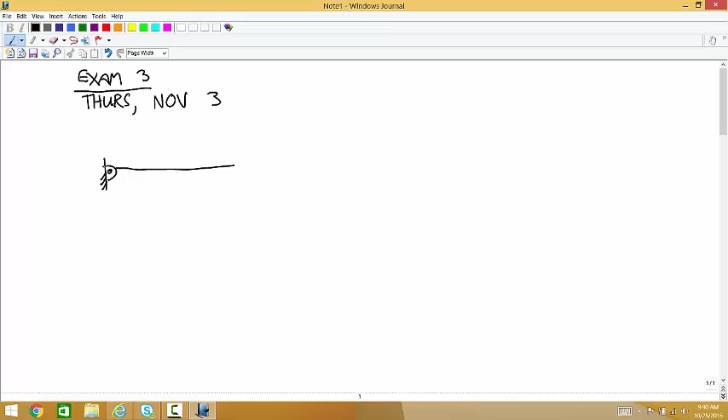So my problem is, I want to capture all the information, I want to get the x-axis, y-axis, I want to calculate the Centroid, and then I want to use it explicitly in my free body diagram. But in our example, it looks like you don't care about the y-axis. So in these problems, where you need to calculate the centroid of a rigid body so that you can use it in a rigid body statics problem, say you have something like this.

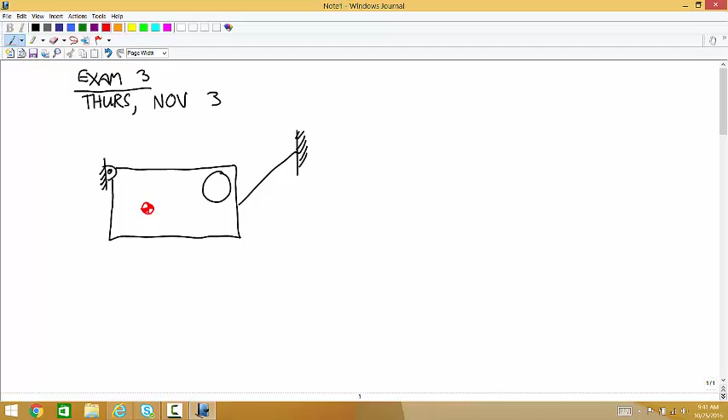To do that problem, you have to figure out where to apply the weight force, and that requires calculating where the centroid is. Say the centroid for this is here. The weight force is straight down, which means you can apply that weight force anywhere along the line of action. And if your coordinate system has x horizontal and y vertical, that means the y position doesn't matter at all. You can set that equal to 0 or whatever you want. It's not going to affect the problem.

That's always true for weight. It's always true for any force, that you can move the point where it acts anywhere along its line of action. So for the weight, if the y-axis is vertical, which isn't always true, but if it is, then the y component never matters. Because you could move this force if you want, you could apply it here. I'm not sure why you would do that, but if you did, you'd get the exact same answer as putting it at the centroid.

So if we have a distributed load on top, and it had a line of action that was horizontal. Yeah, that's what you're looking at. Okay, so this one, you have a weight force.

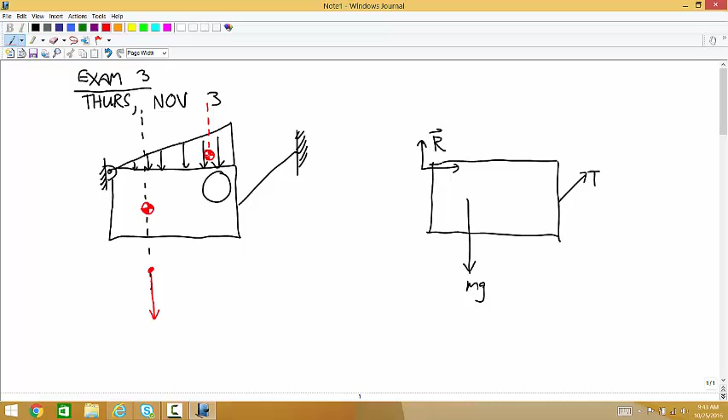The centroid of this thing is here somewhere, right? But the force that we're going to apply at the centroid is vertical, so you can move it anywhere along its line of action, just like the weight force. So you end up not caring about the vertical position of the centroid of the distributed load.

So as long as you keep track of your line of action, you can manipulate your free body diagram. And here's the short answer—that's why it is. But if you just want to know the rules, I think a lot of times those two things go together and reinforce each other.

As long as your y-axis is vertical, for distributed loads and weight forces, the y component doesn't matter of where those are applied. So it could be 0, right? Yeah, you can set it to whatever. But the x has to—the x is the one that matters, because the x position is not along that line of action. Oh, okay, so it's a line of action thing.

Any other homework questions? Number 4? Anyone have that?

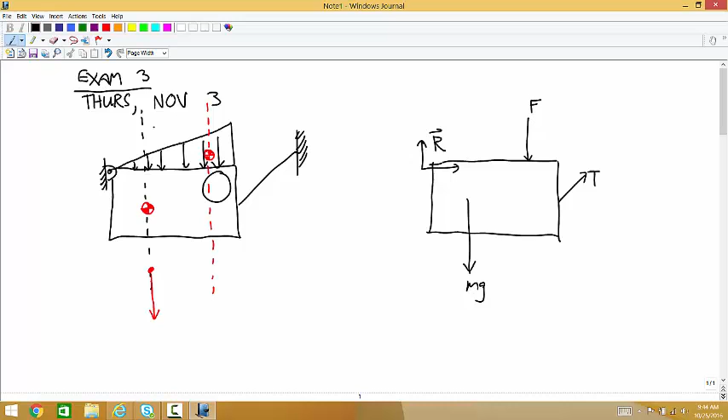Okay, so this one has a pin joint on the left side, and it breaks up like this. This distance is 0.3 meters, this is 0.2 meters. There's a cable like this. This is 0.1, this is 0.1, this is 0.1. The pin is at the midpoint, along that line of symmetry of that top rectangle. And then this distance is 0.4.

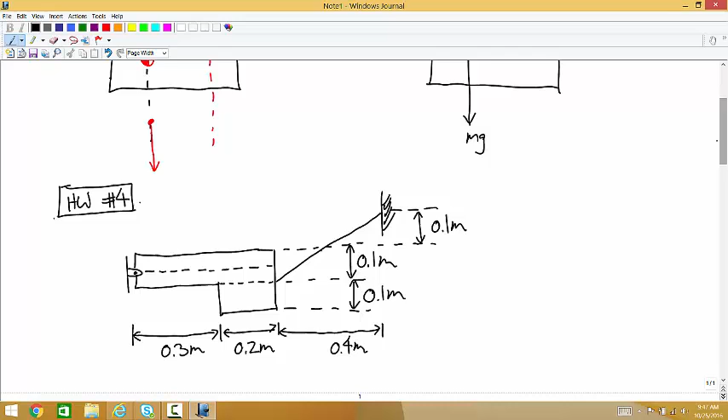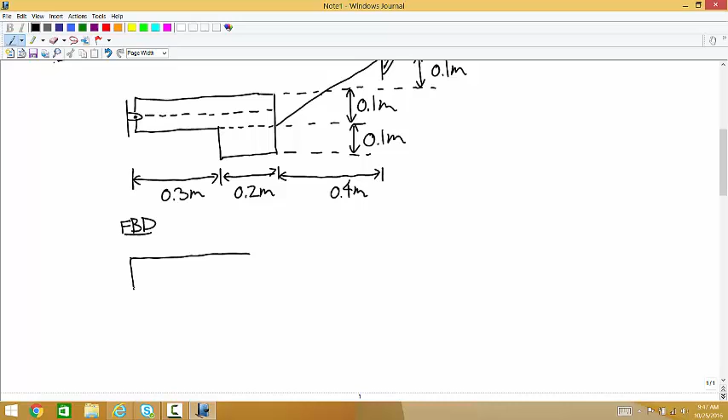I'm not going to go through this whole problem, but let me do the free body diagram. At the pin joint you have a force vector, I'll call that RA. You have to calculate the centroid, and at the centroid there's a weight force—the thing has a mass of 200 kilograms, so this is 1962. And then the only other force is that cable force, T. You can use the locations of the two endpoints of the cable to come up with the unit vector for that tension force.

So in order to do this rigid body problem, you're probably going to choose your about point here, so you might as well put your origin there too. And if your origin's going to be there, then that's where you want the origin to be for your centroid calculation. It doesn't have to be, but you'll have to change things around after you find the centroid if you don't do it that way.

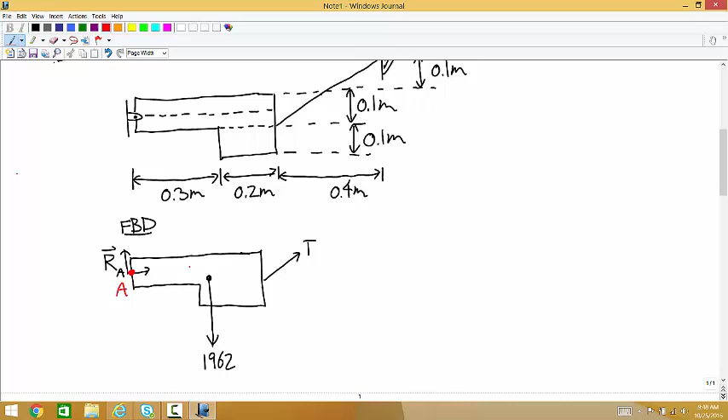For the centroid, you can break this up a couple ways. This is the way I think I would probably do it, 1 and 2, with the origin here. Then calculate the area and centroid of 1 and 2, use the summation formula to find the total centroid. All you need is the x location of the centroid because you're just using it for the weight, but you could calculate both.

Okay, so what if you chose your origin to be here? That's fine. You'll get a value for the centroid that's negative in x, positive in y. Then you have to decide whether you're going to do all your calculations for the rigid body problem in this coordinate system, or whether you want to translate the coordinates into a new coordinate system. And then you would think, oh, I wish I'd just done it this way from the start.

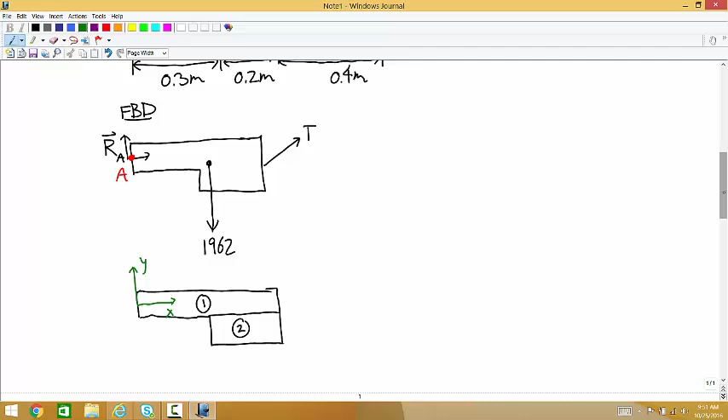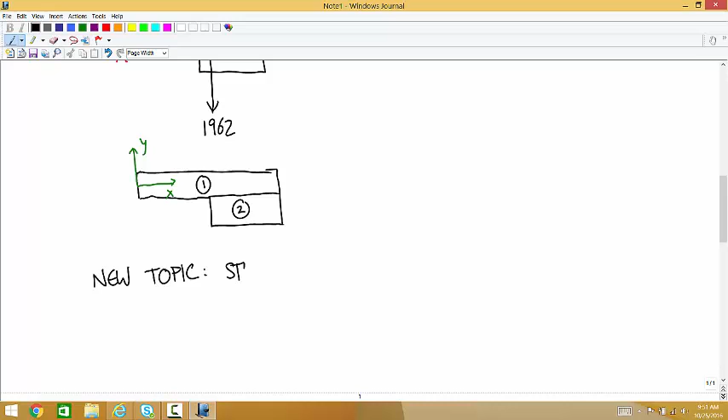Okay, so today we're going to introduce structures. And this is the main topic in this class.

If you went to 100 engineering professors and asked them to test you on how well you know statics, 97 of them would say they don't have time to do that, and that's a weird question to ask. The other 3 would give you structures problems. So this is like, how well do you know statics? If people want to know how well you know statics, they want to know how well you know how to do structures.

And structures are—a structure is a collection of rigid bodies connected by joints.

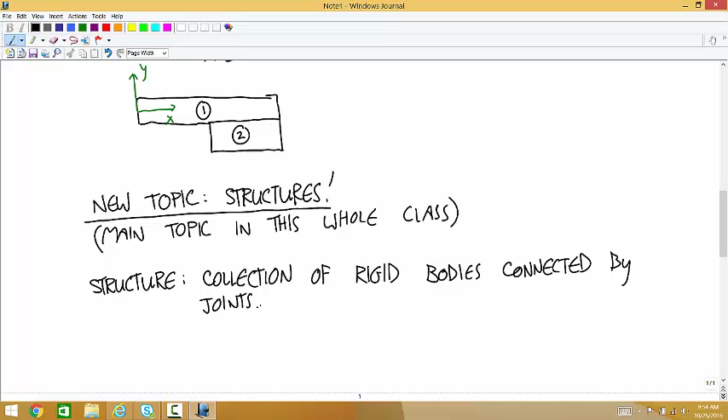So will these be the same type of joints we've seen before? Yep, the same. So in a way, this is nothing but a bunch of individual rigid body problems where at the end you just have to solve a big system of equations. We're going to isolate individual rigid bodies and find Newton's laws. After that's been done for each body, you have a big system of equations.

And the way you want to solve it is reduced row echelon form. You're definitely not going to look at this and think doing it by substitution looks fun.

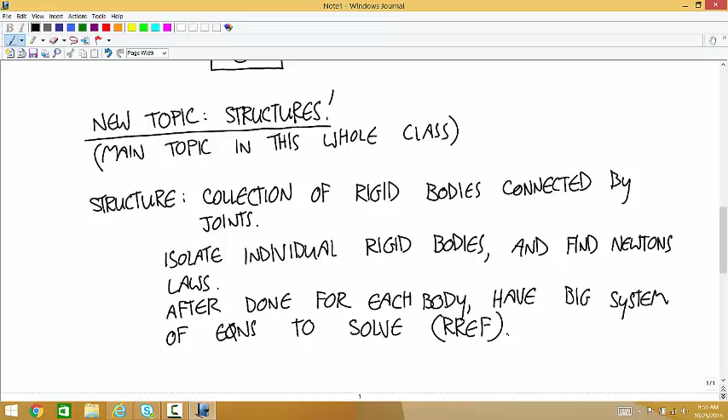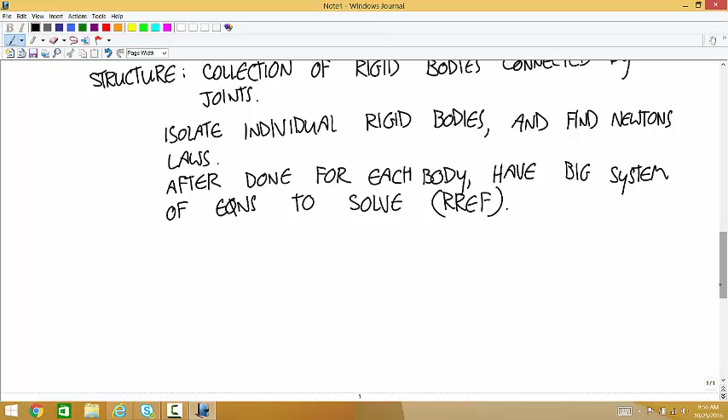So I am going to start by introducing a problem. We're just going to think our way through it, and there's nothing we can't just think through with the knowledge we have now. After I think through it, I'm going to do this problem two ways. Then after that, I'm going to give you a general set of steps that will streamline the process.

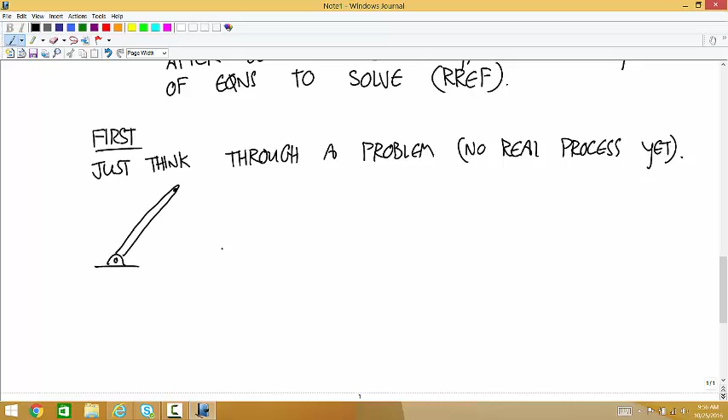So the first thing I'm going to do is just think through a problem. There's no real process yet. So let's say that we have an equilateral triangle, and each of these sides is 1 meter long.

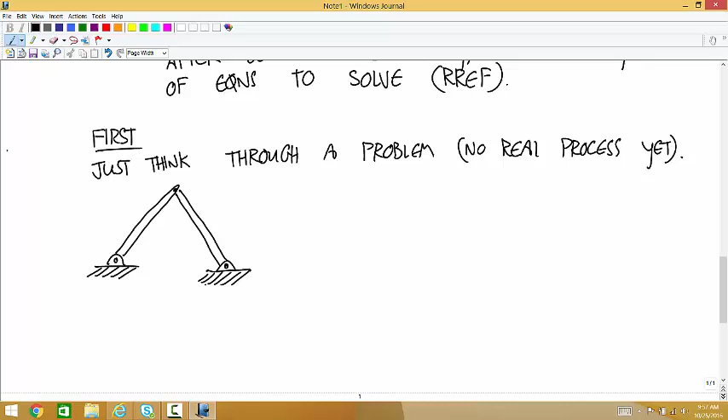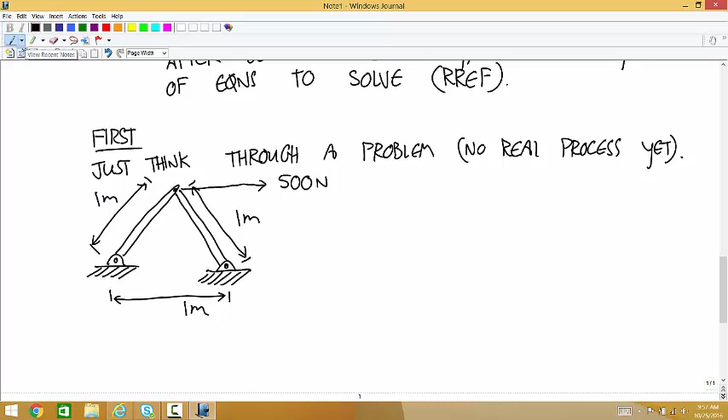And let's say there's a force of 500 newtons applied to the right from the top pin. In order to keep track of what member we're talking about, let's think of the left member as number 1, the right member as number 2, and the pins as A, B, and C.

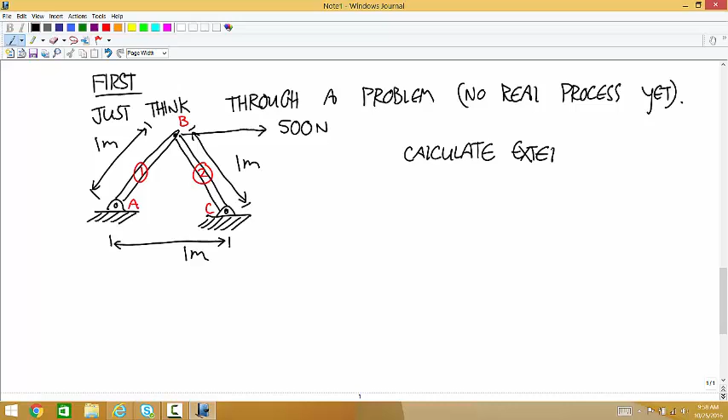And let's say that we want to calculate the external loads on each member.

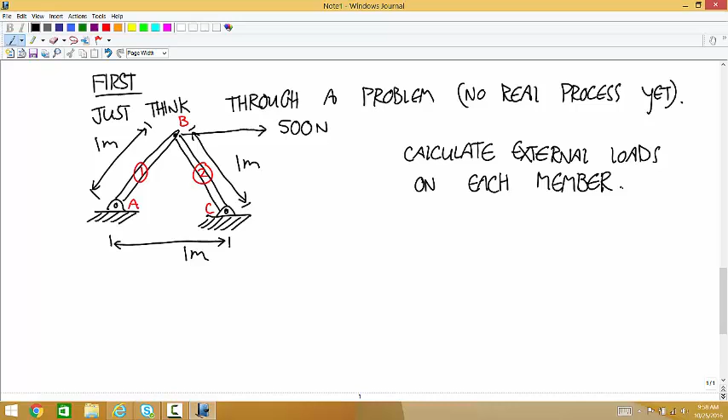One thing we could do is isolate member 1, member 2, and then those pins—you can think of those as individual things. So we could do a particle statics analysis of pin A, pin B, and pin C.

Let's actually skip that step. Instead, we're going to lump these pins in with bodies. That's fine to do—they don't have to be connected or whatever. We're just going to say...

We'll assume that we'll treat pin A as part of the ground, pin B as part of member 1, and pin C as part of the ground. That's going to cut out a few equations because we won't have to isolate those pins—they're just treated as part of the body.

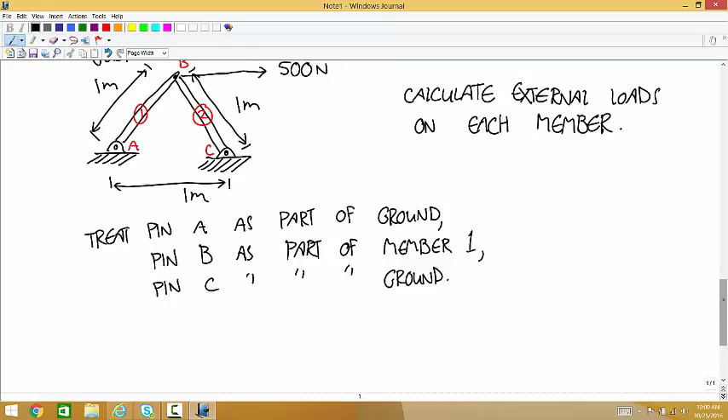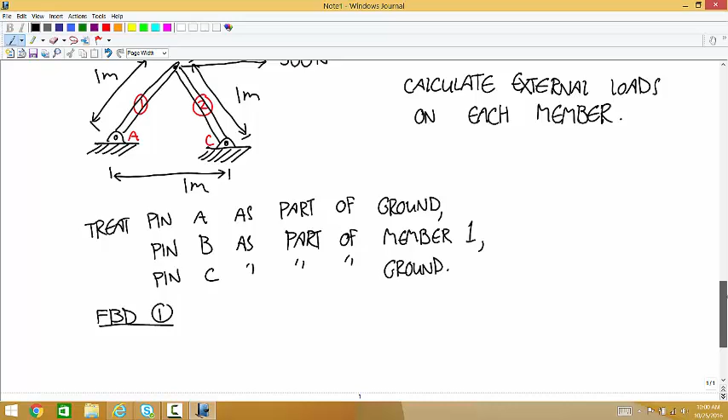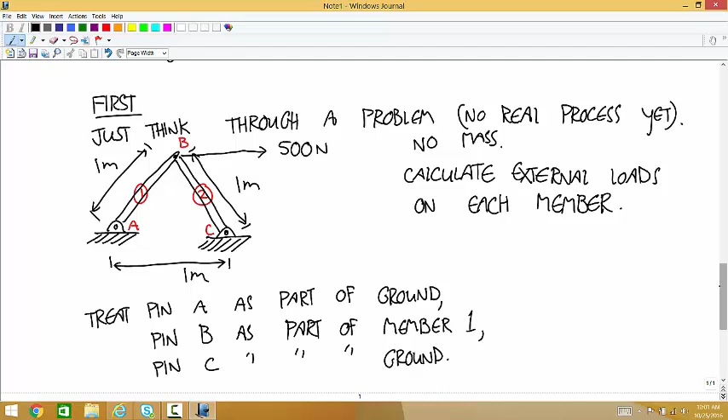Now I'm going to start with member 1. We'll do a free body diagram of member 1 and go through that analysis. So what loads are acting on member 1? Let's ignore the weight for now—ignore the mass of this thing. So what forces are acting?

Down here at pin A, that's a pin joint. So what type of loads are acting on member 1 at A? Full force vector, yep—just using the rules of these joints. We're treating that as part of the ground load? The pin is part of the ground, yeah. So this is a force applied by the ground—really that pin to the member. I'll call that RA, a force vector applied by the ground, the same way you would if that was a rigid body problem.

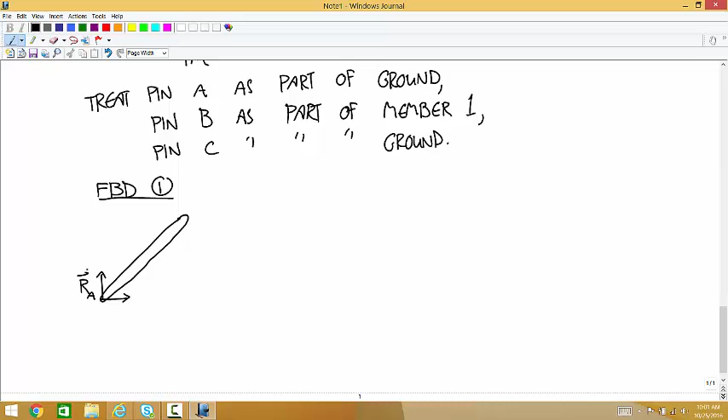And then up at B, all of the forces up here are being applied—they're not really being applied to member 1 proper, they're being applied to the pin. But we're treating the pin as if it's part of member 1, lumping it in. So what forces are being applied to member 1 up at B? Well, definitely that 500 Newton force.

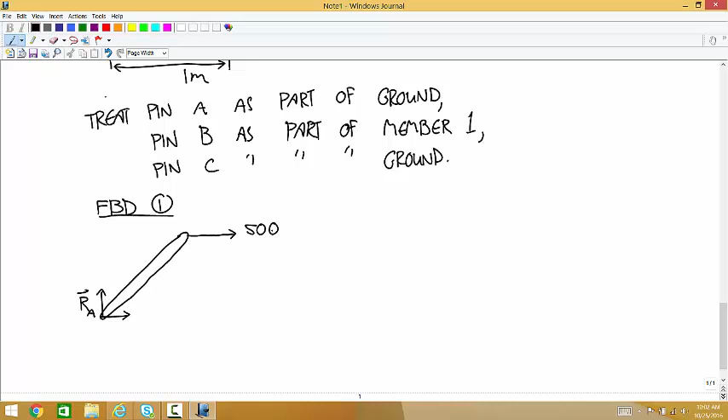And second, there's a pin joint connecting 1 and 2. So there's a full force vector up here. We know it's a force vector because those are the loads that a pin joint applies. I'll write this as the force on 1 by 2.

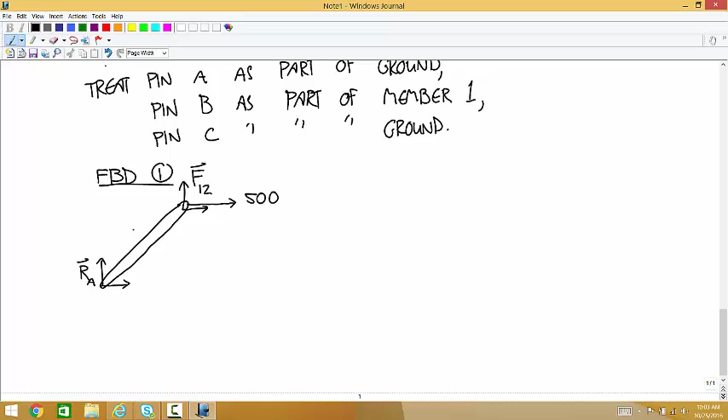Any questions about that free body diagram? It's just for one body, right? Because we have to isolate the individual bodies that make up the structure. This has three individual bodies, but it's just 2 in this case because we're not going to isolate the ground.

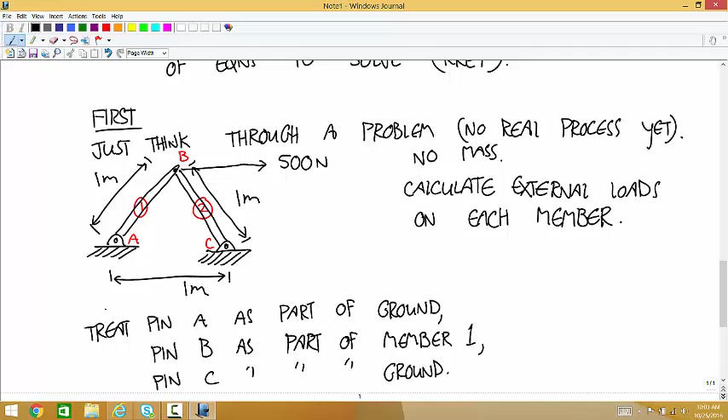Can we put them together and isolate them as one body, or do we have to do it separately? You can, but that's not enough to give more useful equations. We'll see how many variables we have, and that's just not enough to do it. From this one alone, right now we have 4 variables. We know we're only going to get 3 equations from a rigid body, so this isn't enough to do it.

Okay, so now let's figure out the forces and the moments. What do you want to choose as an about point for this? Choose it up here - it eliminates the moment for 2 forces instead of 1.

So, for the force F12, what's the r vector? F12 acts at the about point, so if you think about this red dot as being the origin, the r vector is 0, 0. The force vector is F12x, F12y. Cross product is 0. Now we'll do that 500 Newton force - what's the r vector for that? 0. The force is 500, 0. Cross product is 0.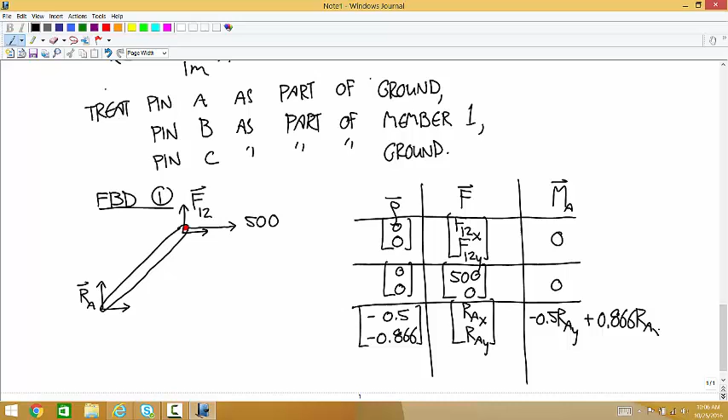Any questions about any of that? So now we're just going to write out these equations. I'm going to skip the step of writing out Newton's laws and just put them into the equation form we'll use later. So Newton's second law, x components: F12x plus 500 plus RAX equals 0. Reformatted, that says F12x plus RAX equals negative 500.

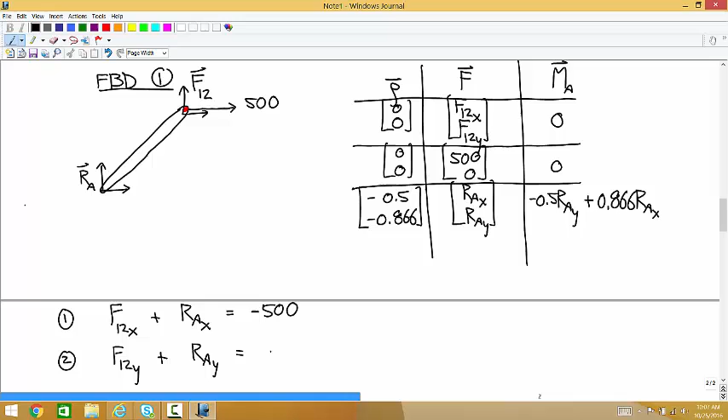Anyone not like me doing this? Should I just write it out? Maybe it can't hurt. Everyone feel okay with this? Okay, and then the second equation says F12y plus RAY equals 0. And then the third equation, rearranging, says 0.866 RAX minus 0.5 RAY equals 0.

So those are our first three equations. Let's think about what we have as variables. We have F12, that's a full vector of variables, and we have RA, that's a full vector of variables. So we have 4 total variables, the 2 components for each one, and we have 3 equations, so we know we can't solve this system. We're just going to hang on to these equations and isolate the other body.

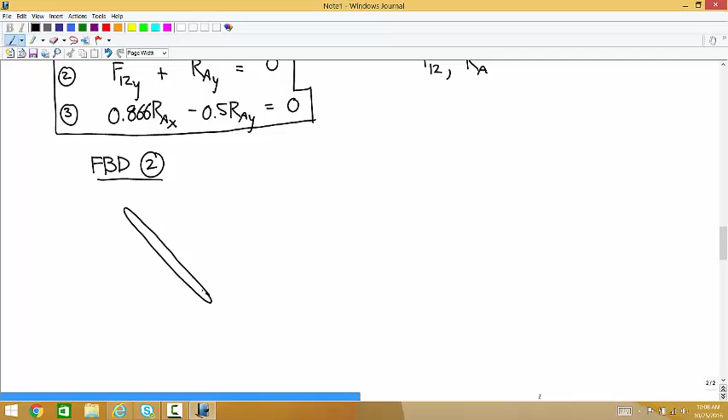So now a free body diagram of member 2. What forces are acting on member 2? Well, the easy one is at C - that's a pin joint with the ground, so I'll just call that RC.

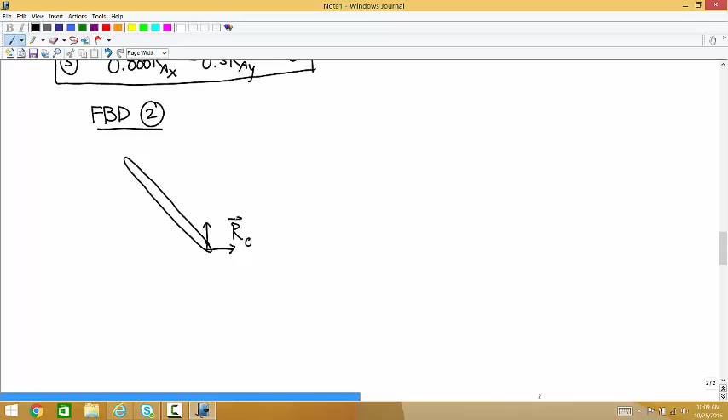And now let's think about what's happening up at the top. This is a little trickier. Remember that the way we've decided to think of this thing, member 1 is a combination of this rigid body 1 and the pin. So member 1 is a body with a pin in it. Member 2 doesn't have a pin in it because you only have one pin, and we chose to lump it in with member 1. You got me on that one?

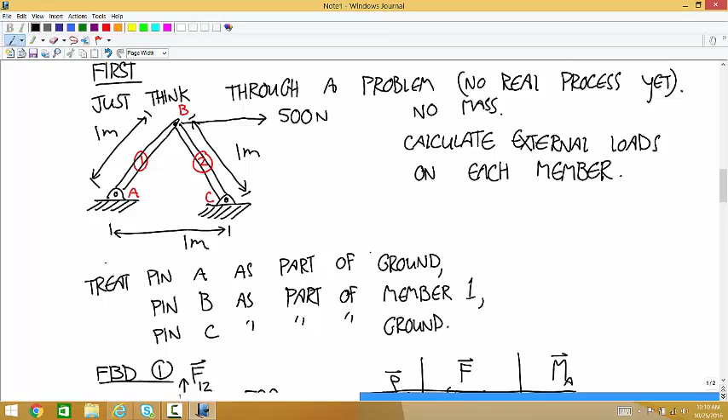And so that 500 Newton force is applied to the pin. It's not applied to member 2, it's applied to member 1. So it's not going to show up in our free body diagram of 2. But 2 and 1 touch each other, so there is a force on 2 by 1. So over here there's a force on 2 by 1, but there's no 500.

Let's think for a second about what variables we're going to introduce with Newton's laws. We're going to introduce RCX and RCY. There's no way around that. So we're introducing two new variables for sure.

But now let's think about this one: F21X and Y. We don't have those variables yet, but we do have F12X and Y. Newton's third law says this is equal to negative F12. So if we use Newton's third law to re-represent F21 as negative F12, we can reduce the number of variables.

But isn't that F21 representing all the force coming from member 1? Yes. Wouldn't that include some amount of force from the 500 Newton force? That 500 Newton force does—if you took that away, there would be a different reaction force up here. So you're right about that. But all of that, whatever that 500 Newton force does, it's applied through this force F21. It translates to this force F21. That 500 Newton force can't be applied to member 2 because it's not acting on 2.

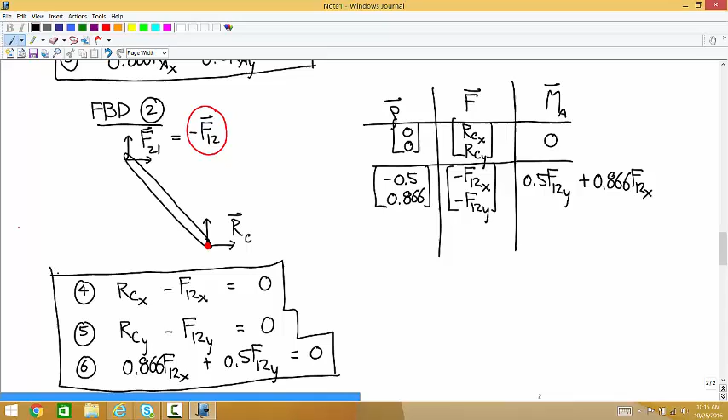Okay, so now we're up to 6 equations. Let's think about our variables: we have F12 x and y components, RA x and y components from those first three equations, and RC from the second set of three equations. So 6 variables, 6 equations—that's a system we can solve.

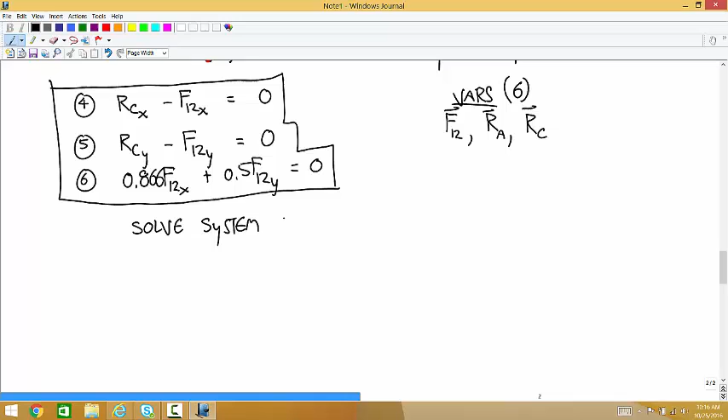Okay, so once you solve that system, what you get out of it is—I wrote this sort of funny—F12 is negative 250, positive 433. RA is negative 250, negative 433, and RC is negative 250, positive 433.

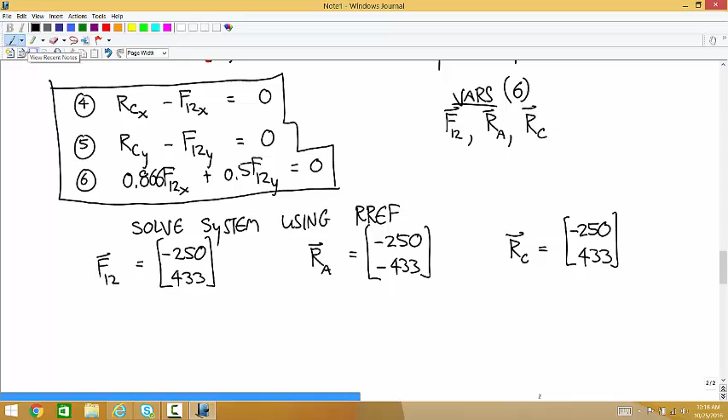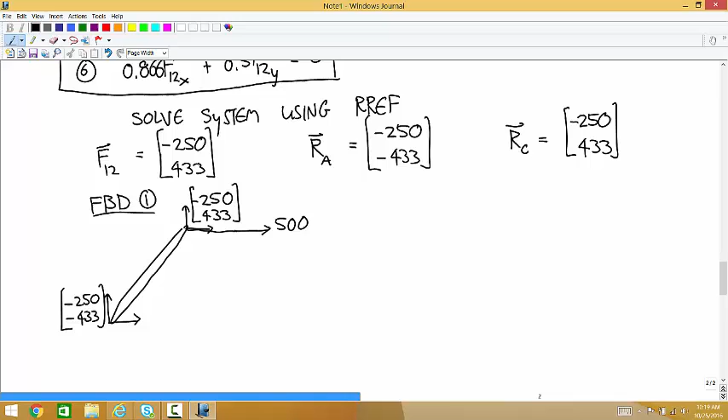Okay, so now let's think about what that tells us about the forces acting on those members. Let's go back to a free body diagram of 1. Down at A, we have negative 250, negative 433. Up at the pin at B, we have negative 250, positive 433, and we also have a 500 Newton force to the right. All I'm doing now is filling in the variables that we had from the free body diagram at the beginning.

I can rewrite this since this 500 Newton force is acting at the same point as this F12. This comes out to add up to positive 250, 433. And down here, negative 250, negative 433.

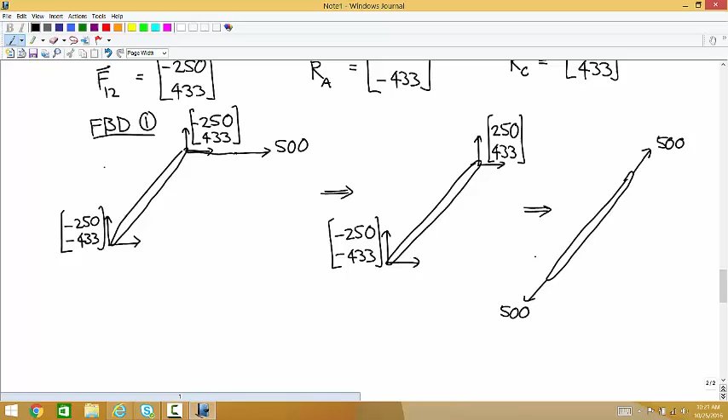Do you happen to notice anything about the directions of those forces? This isn't so important right now, but they're equal and opposite, and they also lie right along the line of this beam. So this beam is in pure tension, and if you calculate the magnitude of this force, it's 500 that way, 500 that way. Wouldn't that just be zero net force then? Well, in statics everything comes out to be zero net force because it's static. But this tells us important things about how likely it is that there's going to be a fracture somewhere—if you apply a tension like this to the body, it's going to behave a lot differently than if you apply a tension of 10,000 to it.

And then the free body diagram of body 2.

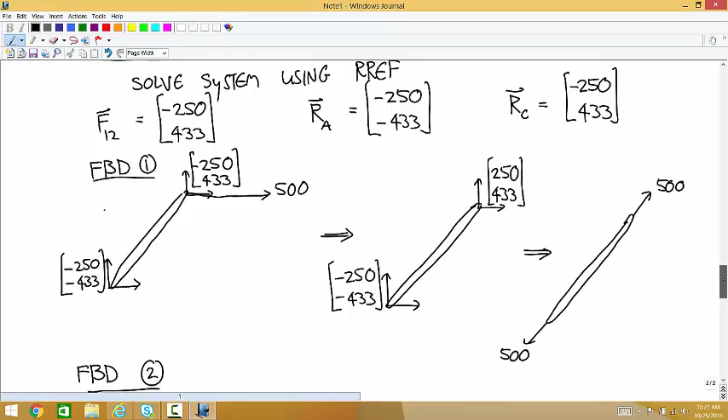Down at the bottom, we have RC. That's negative 250, positive 433. And up at the top, we have negative F12, so the opposite of this F12 that we solved for: 250, negative 433. It's equal and opposite again, and again it's lying right along the length of that body. This time it's the other direction though, so this time we have a compression of 500, 500.

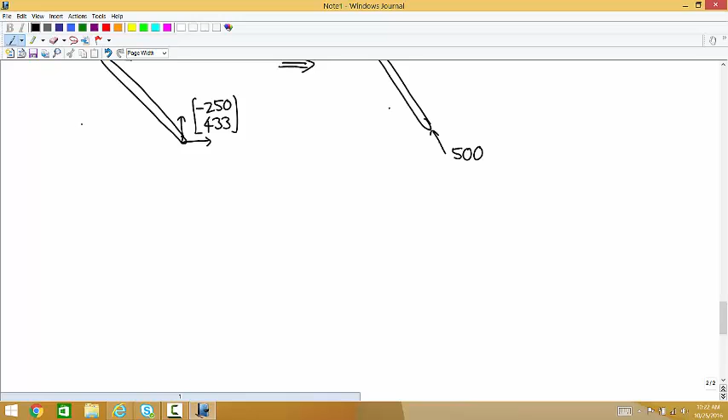So before I say something about the tension and compression that we have there, anybody have any questions about the process? There were some places where, without any more information, I'm sure it would have been tricky, or you would have gotten stuck trying to make these jumps around using Newton's third law or whatever. But I think everything should make sense that we did.

Jesse, yeah? As far as numbering pins, if you were to have a problem with more pins, is a good way to do that making the pins that are on top like 1, and then pins that are on the bottom like 2, and so forth?

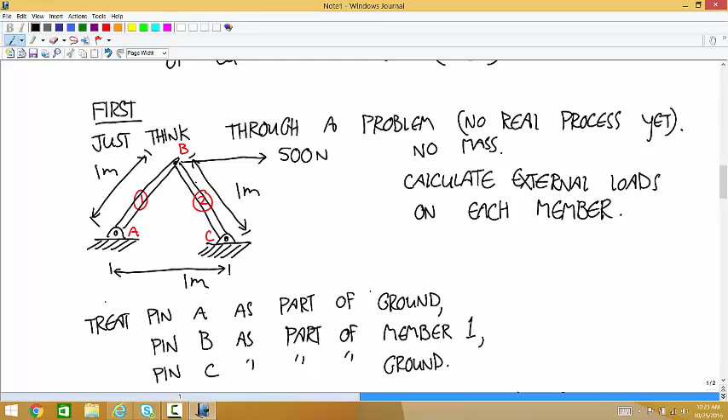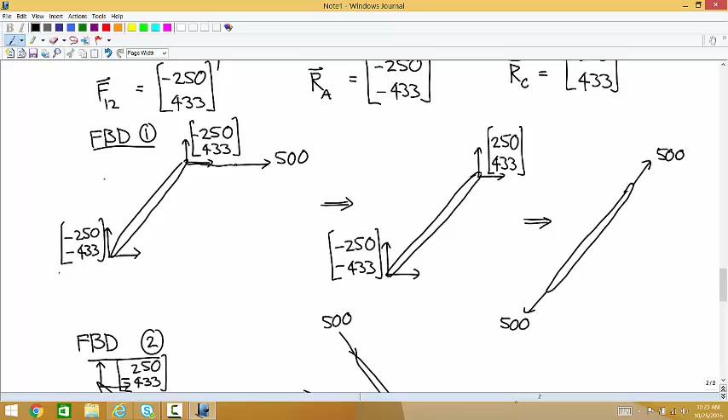It doesn't matter, and that's an important point actually. This is a sort of funny, cool thing. What if I had numbered it the other way, and then I lumped the pin in with member 1 just because it's number 1, it should get the pin? But what if we had called this member 1, and then the pin would have been over here, and the 500 would have been applied to member 2? That changes everything, right? You'd think so, but when you get down to the end, you would get this exact thing back. So it just doesn't matter. The numbering that you choose is just for your own bookkeeping. This is the real thing, and no matter how you number it, this is what you get at the end.

What if the 500 were applied to both 1 and 2? Would that change the answer? Well, then mathematically, if you applied it to 1 and 2, that would be like solving a problem where instead of 500, this was 1,000, because you'd be double counting it, and so your answers would be wrong.

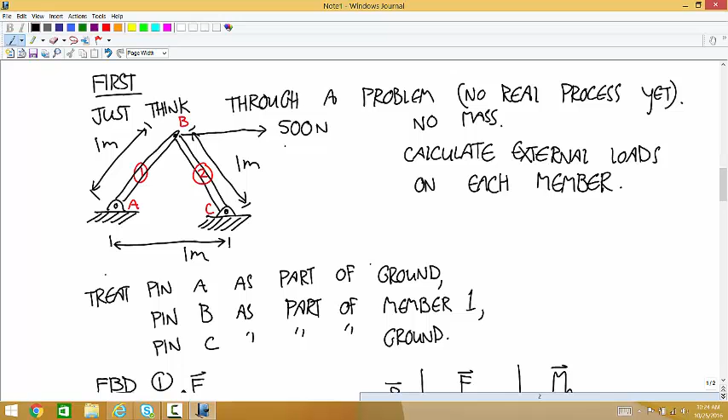Yes? Why can you use different coordinate systems when dealing with different members? Is it just because you're coming out with force vectors? Well, what you're really doing is, in a way, you're not. That's a good and important question. You're not really choosing to change the coordinate system. What you're doing is just an approach that you can use to calculate those rho vectors, and those rho vectors only care about that's just a vector going from one point to the other.

If you wanted to, and I think in my solutions this is still how it appears, you could keep the origin the same, calculate the coordinates of the beginning and end point for that rho vector, and then subtract them to get the rho vector, and you'll get the same answers as you do this way. It's just an approach to calculating rho vectors. Okay.

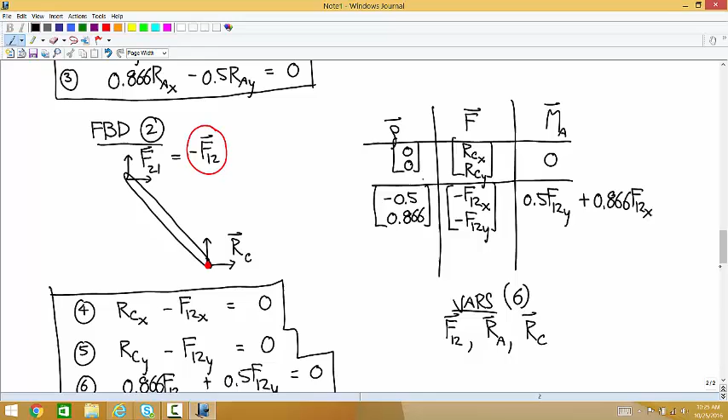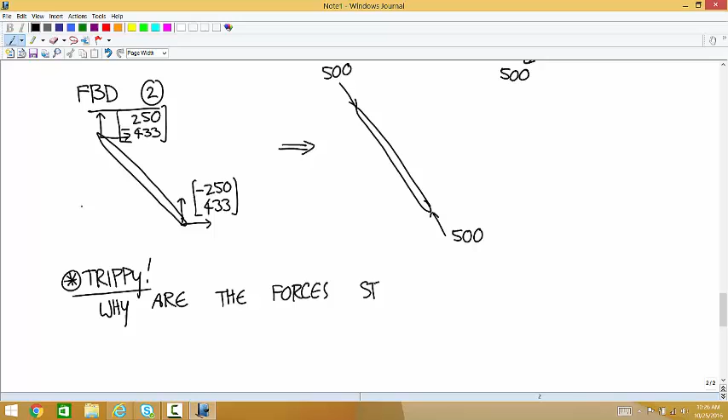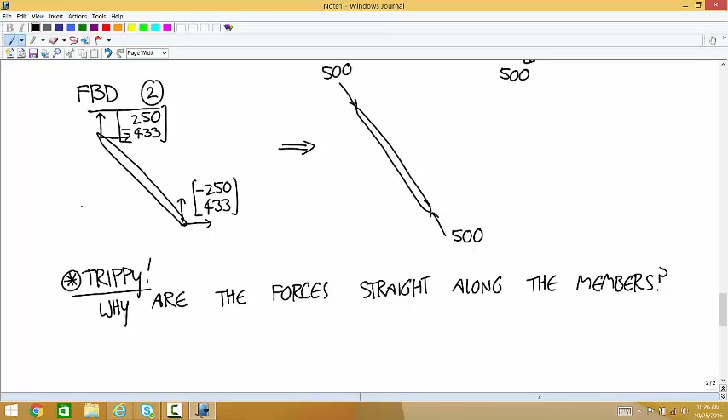Okay, so here, trippy. Why are the forces straight along the members? That has to be the case for any two-force body in static equilibrium.

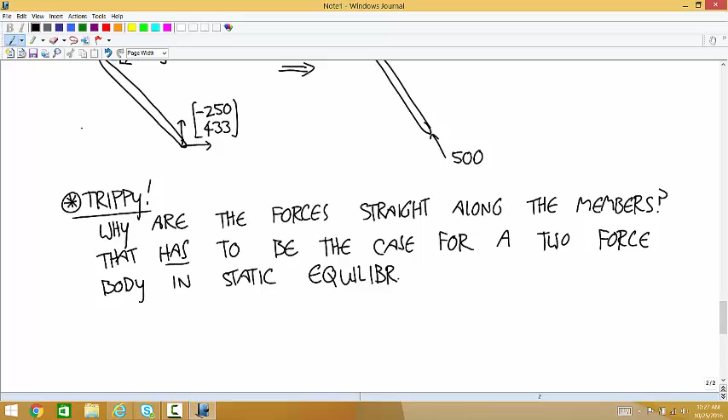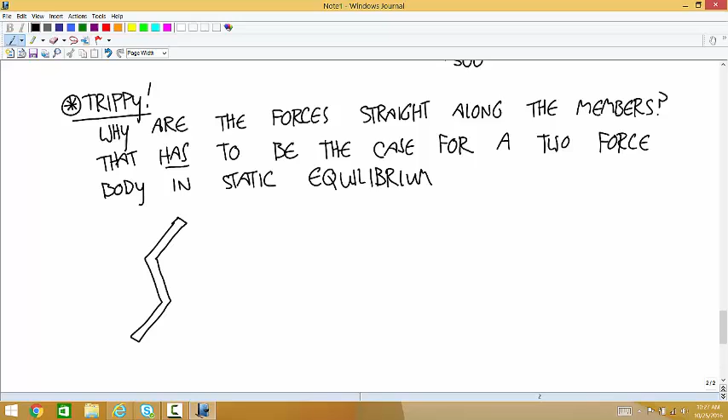So let's see why that is. Imagine that our two-force body is this - okay, there's no reason it has to be straight. And let's say that the forces are here, I'll call that F1, and here, F2.

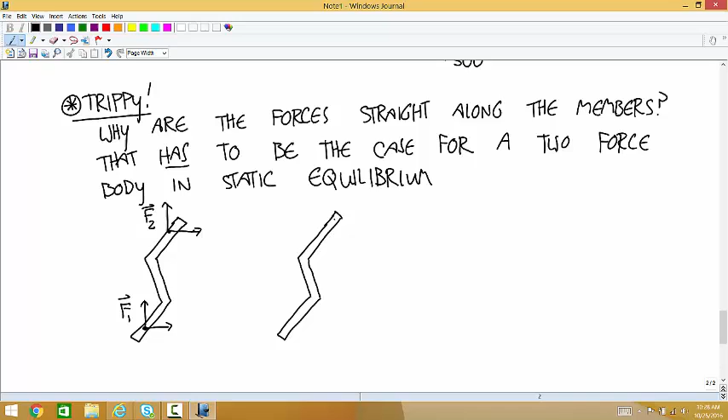Okay, so let's think about two possibilities. Well, what if they're not equal and opposite? What if one goes this way and one goes this way? Well, then it can't be in static equilibrium because the net force is not a zero vector, so you're going to get acceleration, translational acceleration. So that's not possible. These forces must be equal and opposite.

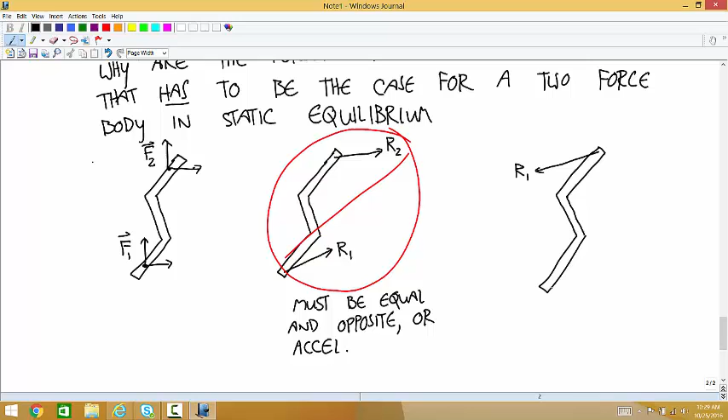Or there's acceleration, which violates the idea that this has to be in static equilibrium. Now how about this possibility? What if the forces are equal and opposite, but that doesn't explain why they have to be along the length of the member. What if one force goes this way and one goes this way? Those are equal and opposite, so what problems arise if the forces aren't equal?

Even if they are equal forces, let's say they're both equal and opposite. So now there's no translational acceleration. But what is going to happen? It's going to spin. So those forces must be along the line connecting them, or you'd get angular acceleration.

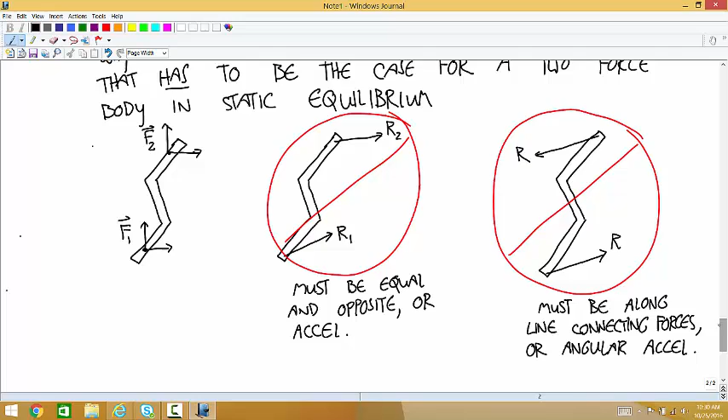Two-force members are not going to come up in structures very often, and that's because in a structure, a single member always has two joints to be part of the structure, and if you include the body's weight, that's a third force, and this condition doesn't hold. So two-force bodies must be weightless. That's why this doesn't come up too often, but I will talk about that more later as part of the truss simplification.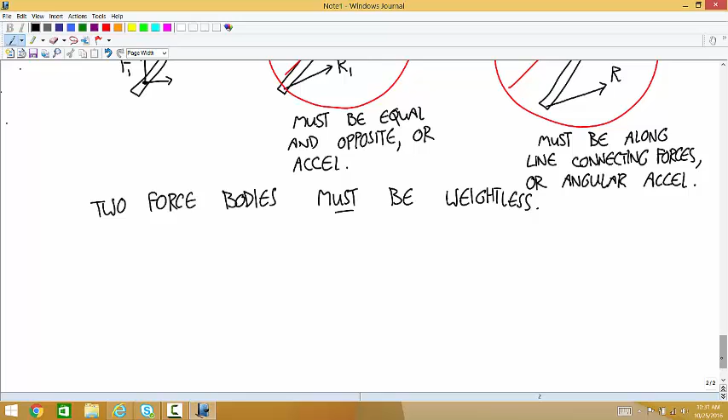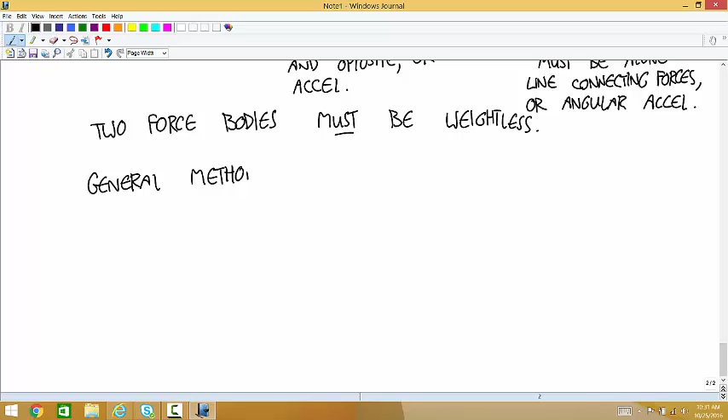Now let me give a general method for structures. It basically outlines the steps we followed in the last example, but it's something you can keep next to you while working through structures, especially at first, to make sure you're not missing any steps.

For structures, will we generally just look at the individual pieces and not treat two rigid body structures connected together as one? You could still just solve it as a single structure using the same approach. Will it generally just be two-force members with one joint on each end? Well, usually they'll have weight attached too, but there's no reason a member only has two joints. That's the more common case, but you could have three or more joints on a single member.

So the first step: number the members. At each joint, some subset of the members will join.

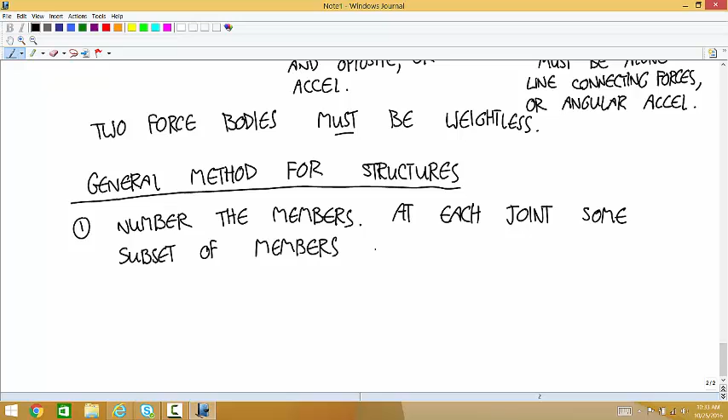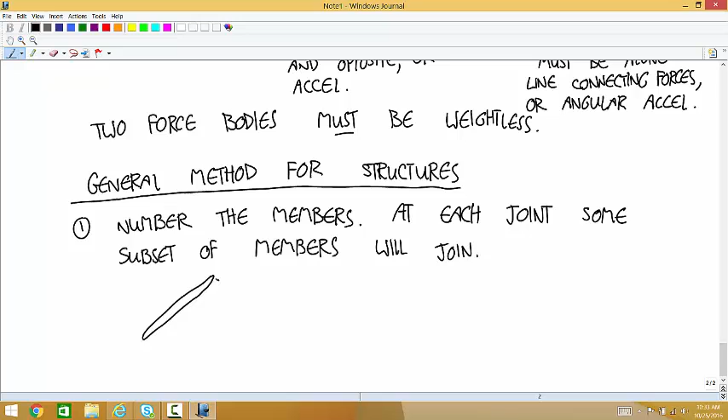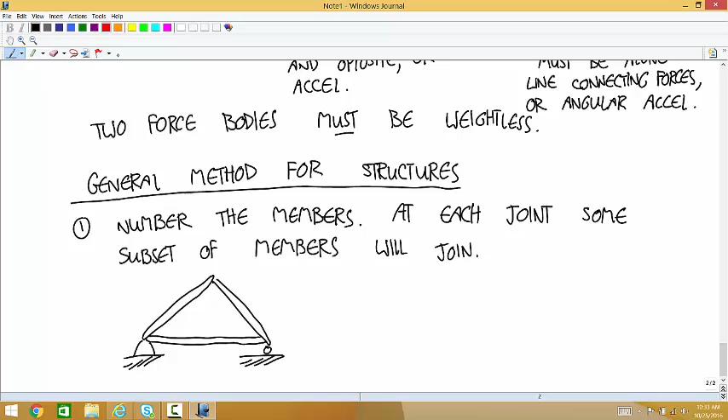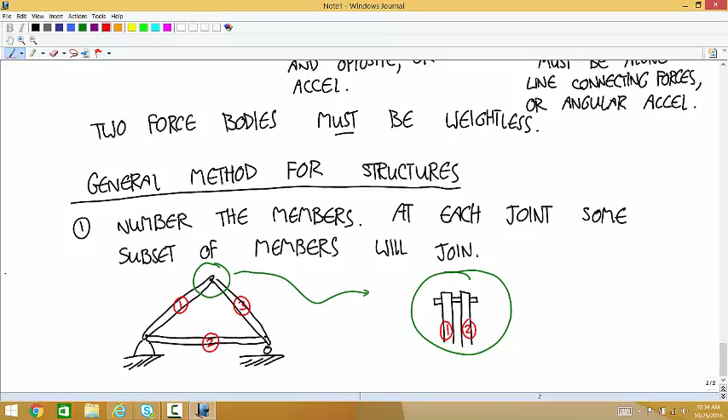Let's say this is the structure. You can number it however you want, but I usually do it from left to right. If you think of a side view of the top pin, and these are all supposed to be connected by pin joints, you'd see member 1 and member 3 not touching each other, but each one touching the pin. That doesn't have to be exactly how the pin joint works, but it's a way to think about it to understand how to do these calculations. So if this is member 1, this is member 3, and this is the pin joining them, members 1 and 3 don't touch each other, but each touches the pin. This scenario is at joint 1 and 3.

1 and 2 would be the other joint. That's good you told me that, because that would have been very confusing. Any questions about that?

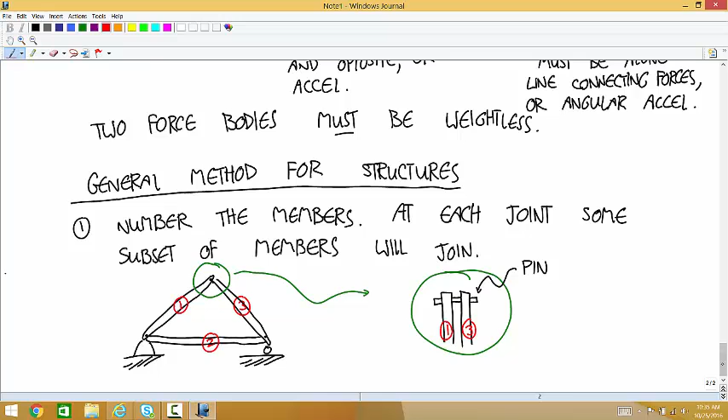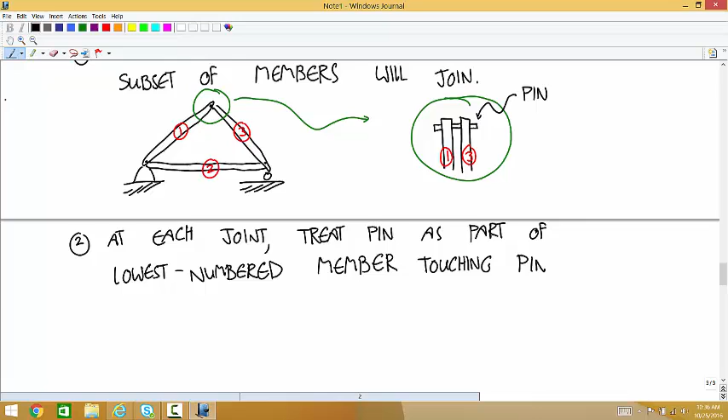Second, at each joint, you're going to treat the pin as part of the lowest numbered member at that joint, the lowest numbered member touching that pin. Third, for each member, you're going to use Newton's second law and the rotational equation, and you're going to use Newton's third law to minimize variables.

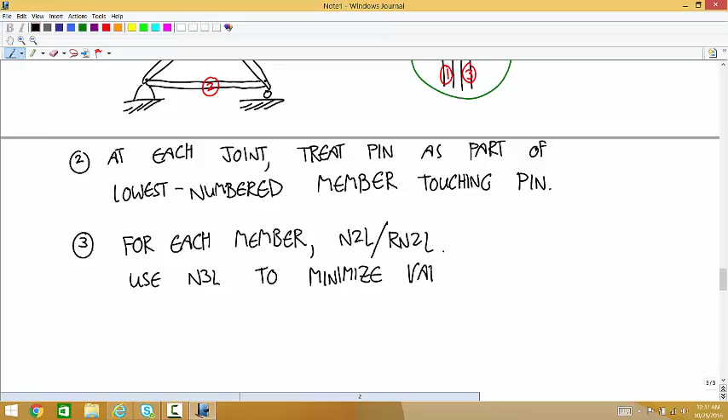So for example, F21 is equal to negative F12, like we did in the last example. And then the last step is to use reduced row echelon form to solve.

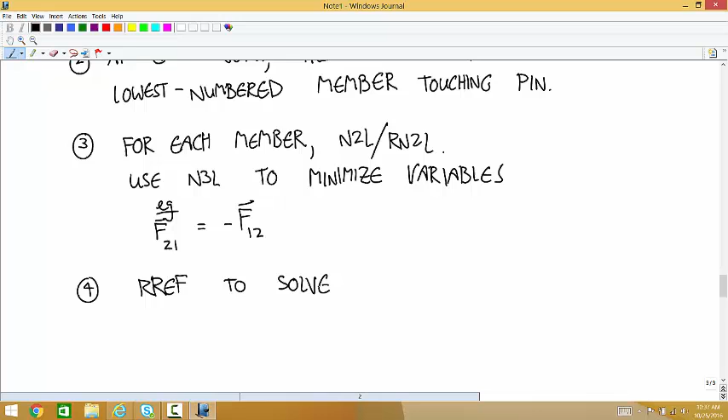Let me say one thing about step 2, treating the pin as part of the lowest numbered member. Here's that side view of the joint again. We're going to assume that pin is part of member 1 — we're going to lump them together, and treat it like member 1 and the pin are no different.

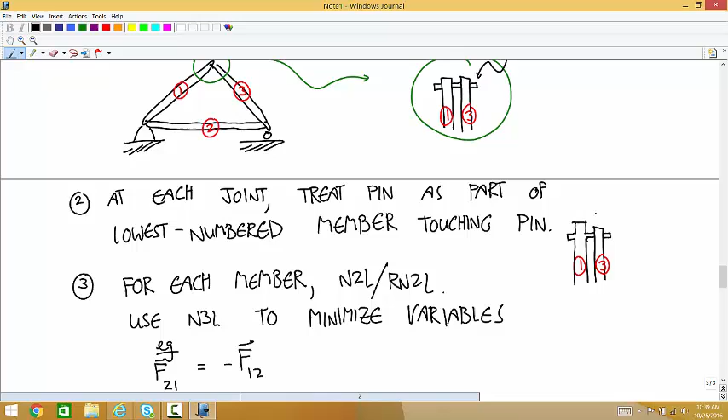So member 3 now is touching the pin, but that pin is part of member 1. In the picture above, 1 and 3 aren't really touching each other, but now 1 and 3 are touching each other. And if you have another external force there, it's going to be applied to the pin, which is part of member 1. That's only applied if there's a force.